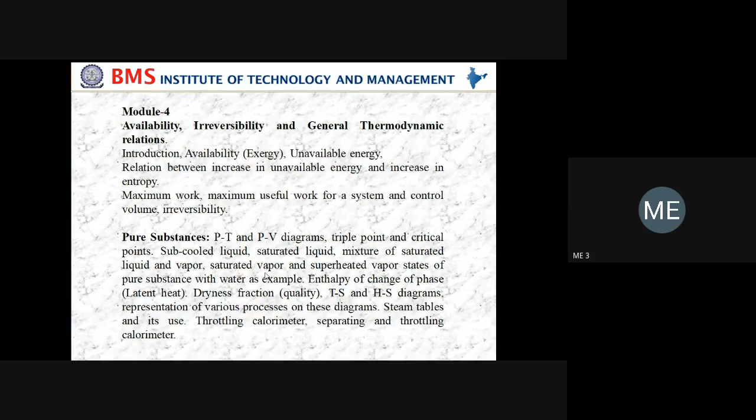So for pure substance, we already studied homogeneous system and heterogeneous system in module one, in the basic definitions of thermodynamics. Can anyone tell me what do you mean by homogeneous phase and heterogeneous phase? Can anyone give an example of homogeneous and heterogeneous system?

So the atmosphere is heterogeneous because of dust particles as well as gas present in it. And if you take a pure substance like a gold bar or pure liquid nitrogen, all those are homogeneous.

Okay, but in terms of characteristics, how are we going to differentiate? Whatever good examples are there, how are we going to differentiate? In what way? What is the exact meaning of homogeneous system, and what is the meaning of heterogeneous system?

So the homogeneous system will have similar behavior all over the entire volume. The entire volume will have the same behavior. But heterogeneous, the entire volume will have different behavior at different points.

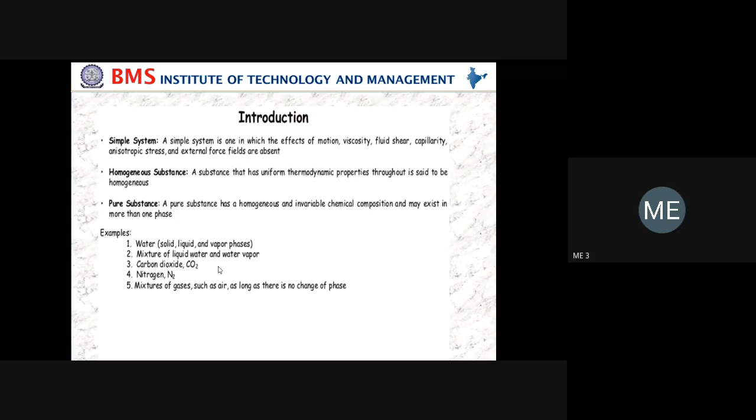For example, water: solid, liquid, and vapor phase. Solid means ice, liquid phase is water, and vapor phase is steam. A mixture of liquid water and water vapor is also a homogeneous system, and that is an example of pure substance. Carbon dioxide, nitrogen, and mixtures of gases such as air are also examples of pure substance.

So whenever they ask about pure substance, you have to define it like this: it is homogeneous in composition, homogeneous in chemical aggregation meaning the chemical composition remains the same throughout the system, and invariable in chemical aggregation, meaning the state of chemical combination does not change with respect to time. These are the three main points related to pure substance.

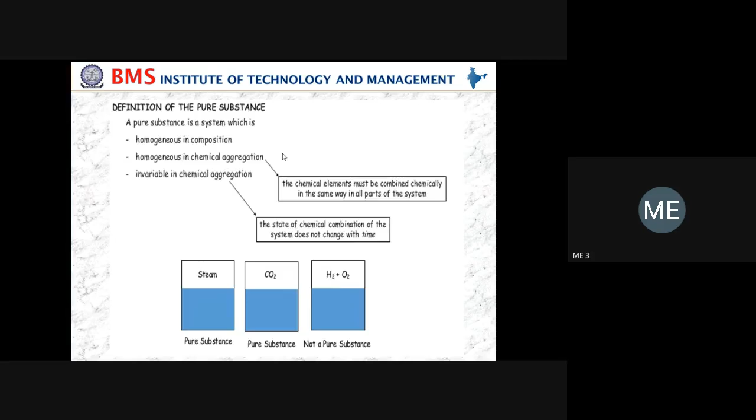Now, here mainly we are going to deal with steam in this chapter. What is steam, the different conditions of steam, how the formation of steam takes place. And you already studied steam tables in Elements of Mechanical Engineering.

Can anyone tell me the significance of steam tables? Where are you using steam tables? Hope you have done problems on steam tables also. What is the importance of the steam table, and where are you using it?

Okay, steam table. I'll explain in further classes. It gives the details of steam at various pressures and temperatures - what is the enthalpy, what is the entropy. We get all this information using the steam tables. By knowing the steam table, we can easily find out the remaining properties.

Before that, first we should know what is steam. It is the vapor of water, and it is invisible when pure and dry. So it's difficult to see the pure form of steam.

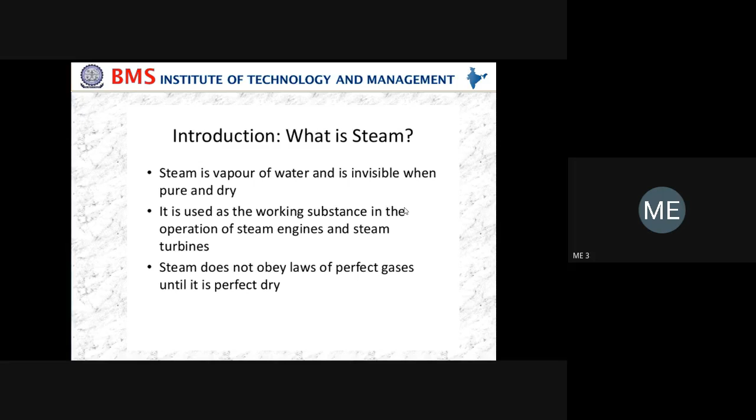Starting, we consider 1 kg of water at 0 degrees Celsius, and the initial volume of the water is represented as V1. This is the starting phase - just a basic diagram.

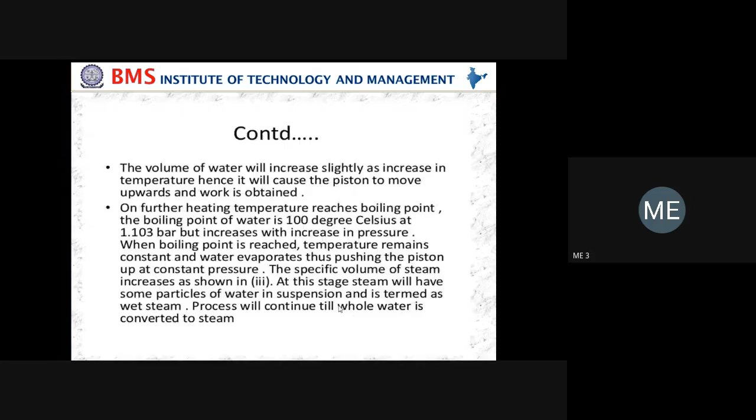I'll repeat once again. It is formation of steam at constant pressure. Consider 1 kg of water at 0 degrees Celsius in a cylinder bounded by a piston. A weight is placed over the piston, and whatever weight is placed on the piston balances the upward force exerted by the water. According to Pascal's law, the fluid exerts pressure equally in all directions.

We are going to learn Pascal's law in fluid mechanics in the fourth semester, so we'll come to know everything. According to that law, the fluid exerts pressure equally in all directions. Whatever upward force is exerted by the water balances the downward force exerted by the weight placed on the piston.

V1 is the initial volume of the water. Anyhow, pressure remains the same, that is 1 atmosphere pressure, 1.01325 bar. We are going to supply heat externally to the cylinder. On supply of heat to the water, the temperature of the water increases, and then the water slowly starts changing its phase from water to vapor.

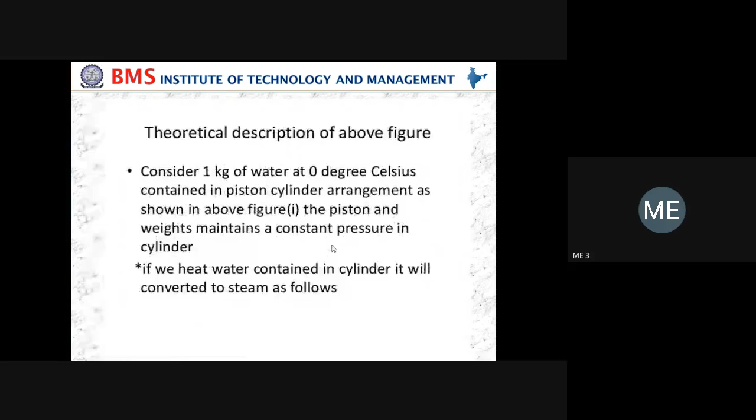On further supply, once the water reaches the saturation temperature, there is no change in temperature, but all the water particles in the cylinder get converted into steam. So we get the dry saturated steam, and on further supply of heat, that dry saturated steam is converted into superheated steam.

Remember, superheated steam is always achieved when it is the dry steam above the saturation temperature. At saturation temperature, you will not get superheated steam; we have to supply more heat. When the temperature of the steam is above 100 degrees Celsius, then only we'll achieve superheated steam. This is how the formation of steam takes place at constant pressure.

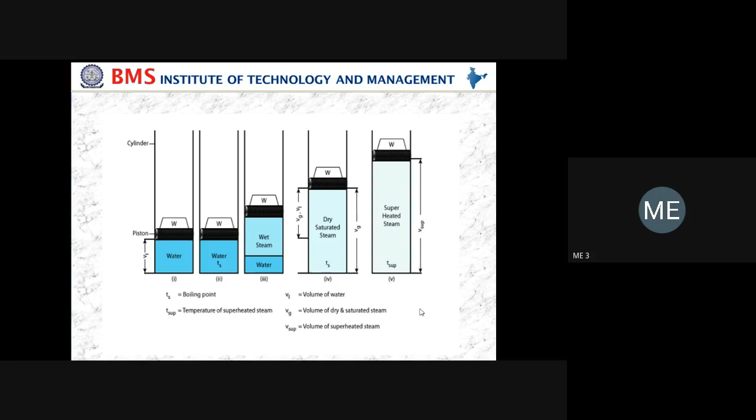So you have to draw these five diagrams plus this enthalpy TH diagram. Based upon that, we are going to define these terms. There are three phases of steam: one is wet steam, second is dry steam, and third is superheated steam.

Wet steam is the mixture of water plus steam. In the exam they may ask you to define the term wet steam: mixture of water plus steam, that is liquid plus vapor, at the boiling point temperature of water at a given pressure. The boiling point of water is 100 degrees Celsius. Remember, it is the mixture of water and steam at the boiling point temperature of water at a given pressure.

Next, dry steam. Dry steam is steam at a given pressure that contains no water particles in suspension. It is also called saturated steam, dry saturated steam, or dry steam.

So here it does not contain any water particles in suspension. Superheated steam is when you heat the dry steam above the saturation temperature, above 100 degrees Celsius. Whatever condition of the steam we get then is called superheated steam. These are the 3 basic types of steam.

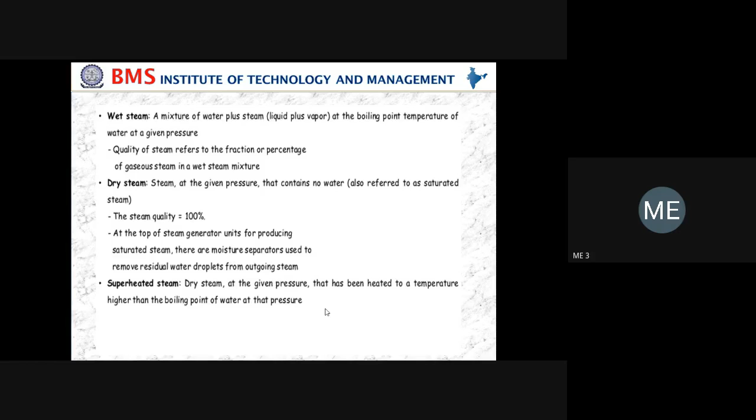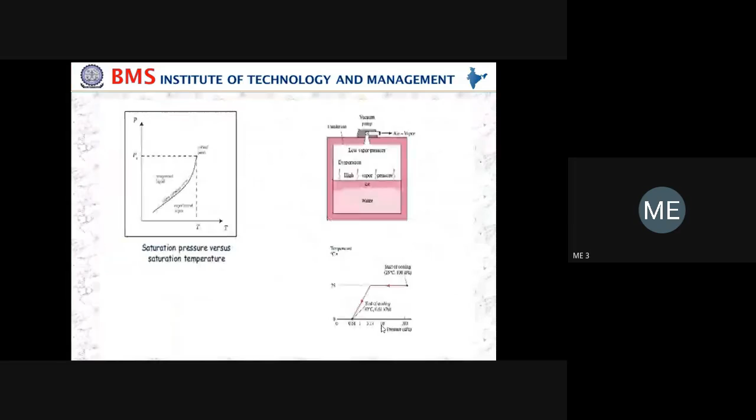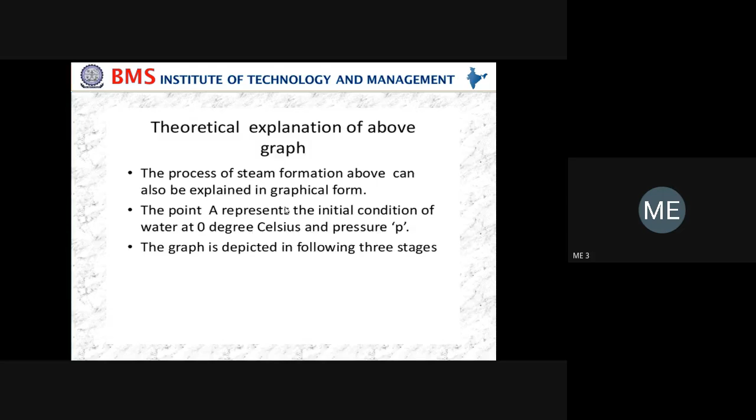And one more thing, here they will ask you to draw the TH diagram or TV diagram. Don't make confusion between TH and TV diagram. Whatever I explained, these are different diagrams. Starting with what I explained, it was the TH diagram, temperature enthalpy diagram, so in the x coordinate you take enthalpy and in the y coordinate you take T. Whatever diagram I am explaining now is the TV diagram.

In the exam particularly they ask you to sketch the TV diagram for a pure substance, or the pH diagram for a pure substance, like that. So be careful with the coordinates. Whatever I am explaining now is the TV diagram, temperature and volume diagram.

So first you have to draw this curve. This first curve is the saturated liquid curve, and whatever line we are drawing is called the liquid saturation line. Then we have the saturated vapor phase, and whatever line represents that is called the vapor saturation line. And here we have wet vapor.

Wet vapor means it is a mixture of water particles and vapor phase. And whatever you see here is called the CP or critical point. In pure substance, we have two important terms: one is called critical point, and the second one is called triple point.

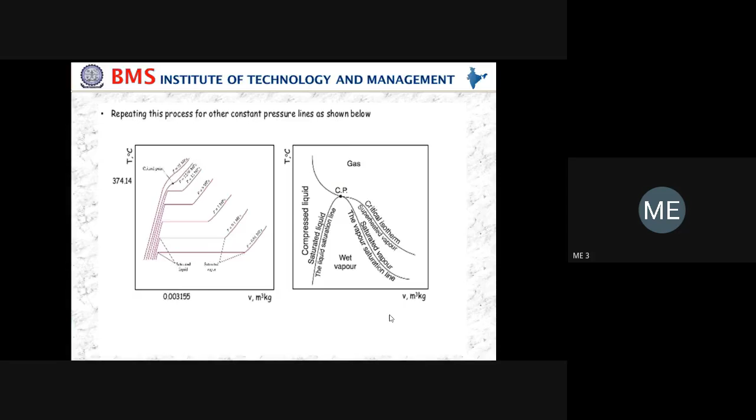So can anyone explain what you mean by triple point? I explained this already in the first chapter. Anybody? What is the meaning of triple point? Triple point of water. Anyone? Anybody, triple point of water?

For water it is 0.01 degrees Celsius at triple point. Correct. But how will you define triple point of water? In the definition of triple point, sir, it is a state where the solid, liquid, and vapor phases of water together are in equilibrium. Correct. All three phases, solid, liquid, and vapor phases of a pure substance, exist in equilibrium condition. That is called the triple point.

And in this chapter you are going to study one more point called the critical point. The critical point is the point where all the liquid phase is directly converted into vapor phase without supplying heat. So that is the definition of the critical point. There is no distinct phase between the liquid phase and vapor phase beyond this, there is a direct conversion of liquid into vapor phase beyond the critical point.

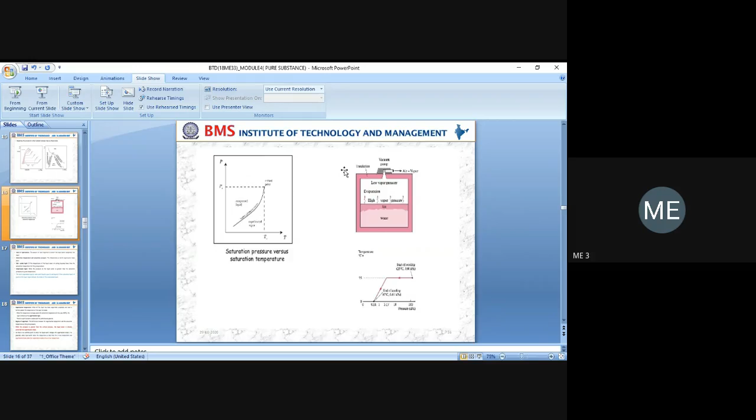First term is heat of vaporization. How do we define the amount of heat required to convert the liquid water completely into vapor? See in the diagram, this is called heat of vaporization. The amount of heat required to convert the water at saturation temperature, that is called heat of vaporization.

Can you tell me the other name for this one? What is the other name? There are two terms: one is latent heat and one is sensible heat. What is the difference between latent heat and sensible heat?

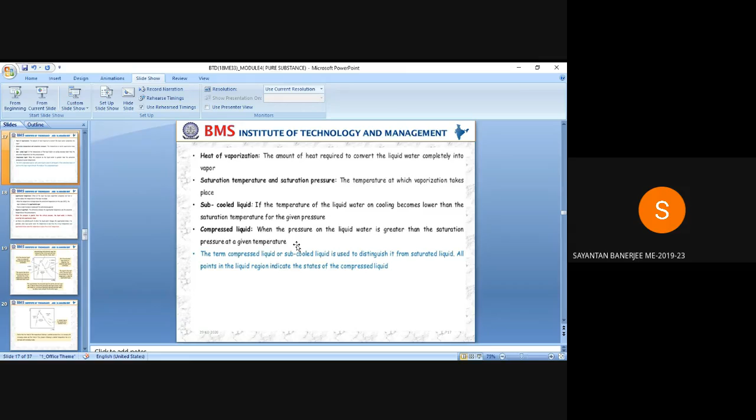Latent heat is heat that is present in the substance when change of phase is occurring, and it cannot be measured using a thermometer, but sensible heat can be measured by seeing the rise in the thermometer liquid. Correct. So the first one is sensible heat.

As I said, during the supply of heat, the temperature of the water changes. Whatever the temperature between 1 and 2, that is called sensible heat. Amount of heat required to convert 1 kg of water at 0 degrees Celsius to 1 kg of vapor phase at saturation temperature - this includes both water and vapor phase. It's a conversion of 1 kg of water, amount of heat required to convert 1 kg of water at 0 degrees Celsius and 1 atmospheric pressure up to saturation temperature. That is called sensible heat.

Whatever portion is there in between this straight line, that is called latent heat. Latent heat means the amount of heat required to convert 1 kg of water at saturation temperature. Here you start by taking 0 degrees Celsius, but while defining latent heat, you have to change the definition. The amount of heat required to convert 1 kg of water at 100 degrees Celsius at saturation temperature to 1 kg of dry saturation steam at the same temperature and given pressure.

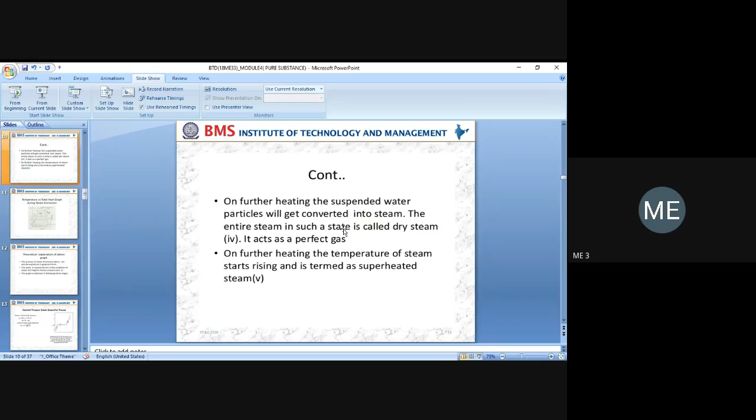And then we have two more terms called subcooled liquid and compressed liquid. See in the diagram. The definition of subcooled liquid: if the temperature of liquid water on cooling becomes lower than the saturation temperature at the given pressure, that is called subcooled liquid. The temperature of the liquid water on cooling becomes lower than the saturation temperature.

Temperature of the liquid phase on cooling becomes lower than the saturation temperature at a given pressure. Such condition is called subcooled liquid.

On the other hand, we have compressed liquid. Compressed liquid means when the pressure of the liquid is greater than the saturation pressure at a given temperature. So we have saturation pressure and saturation temperature, the condition of the steam at saturation temperature and saturation pressure. When the pressure of the liquid is greater than the saturation pressure at a given temperature, that is called the compressed liquid.

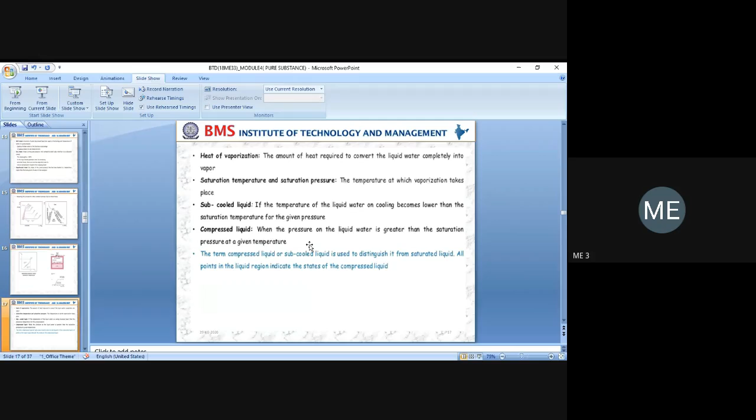Apart from this, we have superheated temperature. Superheated steam is achieved when you supply heat above the saturation temperature. When all the liquid has evaporated completely, meaning there are no water particles in suspension, and heat is further added, the temperature of the vapor increases. When the temperature increases above the saturation temperature, the vapor phase is called superheated vapor. Superheated vapor is achieved by heating the dry saturated steam above the saturation temperature. That is called superheated temperature. So one is saturation temperature and one is superheated temperature.

Next, degree of superheat. Hope you understood saturation temperature and superheated temperature - that is when the temperature increases above the saturation temperature, called superheated temperature. Saturation temperature is the boiling point of water, that's 100 degrees Celsius. The third term is degree of superheat, the difference between superheated temperature and saturation temperature at a given pressure. For example, if 300 degrees Celsius is your superheated temperature and 100 degrees Celsius is the saturation temperature, then degree of superheat is 300 minus 100, that is 200 degrees Celsius. So it's the difference between superheated temperature and saturation temperature at the given pressure.

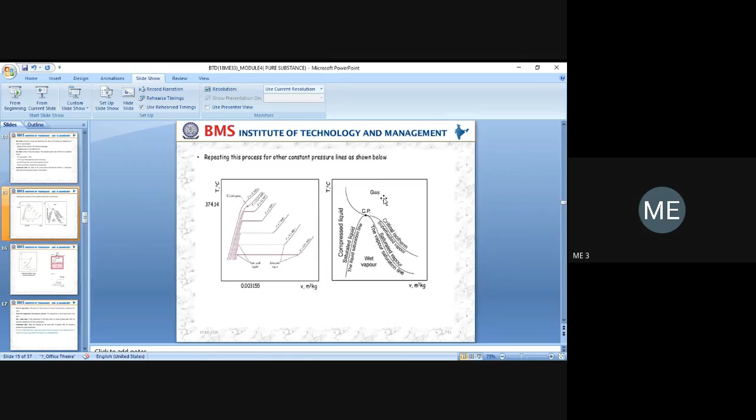One more important term: when the pressure is greater than the critical pressure, the liquid water is directly converted into superheated steam. Look at the diagram - whenever the working substance has pressure greater than the critical pressure, all the liquid is directly converted into superheated steam. This is one of the important points.

So we studied the temperature enthalpy diagram, second one the temperature volume diagram. We studied first the TH diagram, that is formation of steam at a given pressure. Second, we studied the temperature volume diagram, and third one we are going to study now.

This is called the PT diagram, pressure versus temperature diagram. Pressure you take on the y coordinate and temperature on the x coordinate. Remember the nature of the curve, how you draw it in the TH diagram and in the PV diagram, and then we have the PT diagram. So be careful about the x and y coordinates - on the y coordinate take pressure, and on the x coordinate take temperature.

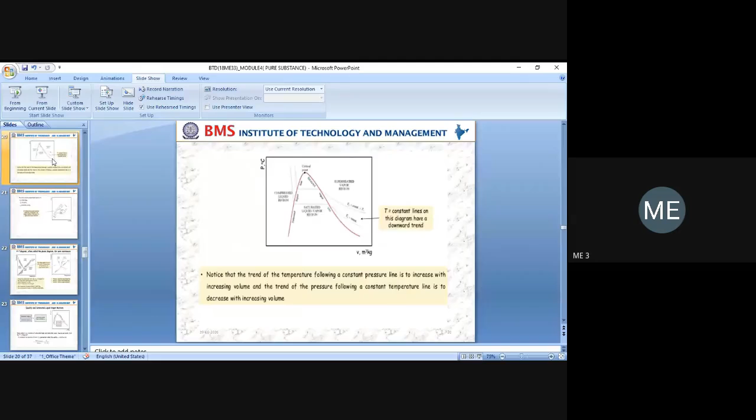These are the most important diagrams, you have to practice all of them. One is the TH diagram, second one is the PV diagram - first one TH, then TV, and then PT. These are the three diagrams.

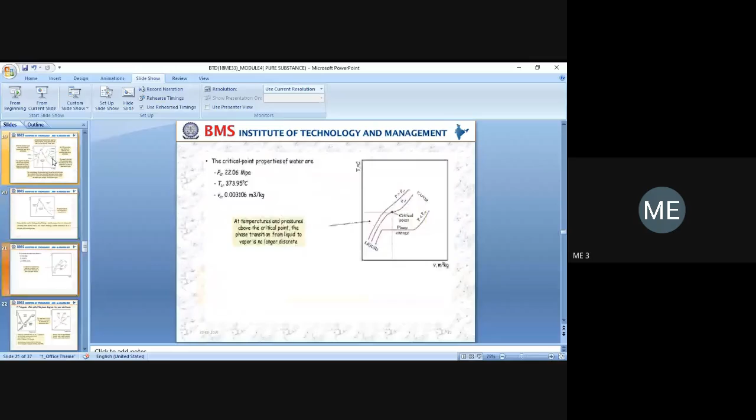One is vaporization, one is sublimation, and one is condensation. Vaporization means the amount of heat required to convert 1 kg of water to 1 kg of steam. That is called vaporization. There is a change of phase from liquid to vapor. Second one is condensation. Anybody, what do you mean by condensation?

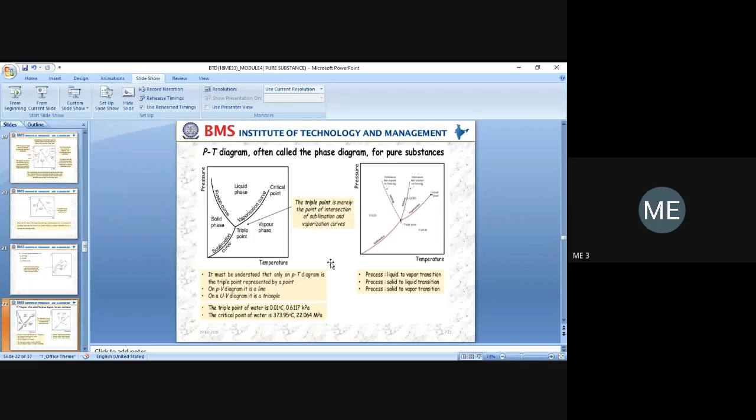Okay, next, what I said. So sometimes they used to ask, define the term sensible heat. As I said, it is the amount of heat absorbed by 1 kg of water when it is heated from 0 degrees Celsius to boiling point. Sensible heat is the amount of heat supplied to 1 kg of water when it is heated from 0 degrees Celsius to boiling point. It's nothing but your saturation point. This is the definition of sensible heat.

Whatever I have shown in the diagram, the TH diagram, it is there. So whatever temperature, the amount of heat required to convert 1 kg of water at 0 degrees Celsius to 1 kg of water at saturation temperature, that is called sensible heat. That is the definition of sensible heat.

Okay, the second definition is your latent heat, what I said, heat of vaporization or latent heat. And it is represented by, here you have to remember a symbol also: HF is the notation for sensible heat. Okay, same thing you are getting in the steam table, so whenever you are having HF, you recognize it as sensible heat.

And latent heat, or it is the heat of vaporization, that is latent heat, represented by symbol HFG. It is the amount of heat required to convert 1 kg of water at saturation temperature to 1 kg of dry saturated steam at the same temperature, means at saturation temperature and at the given pressure. That is the definition of latent heat.

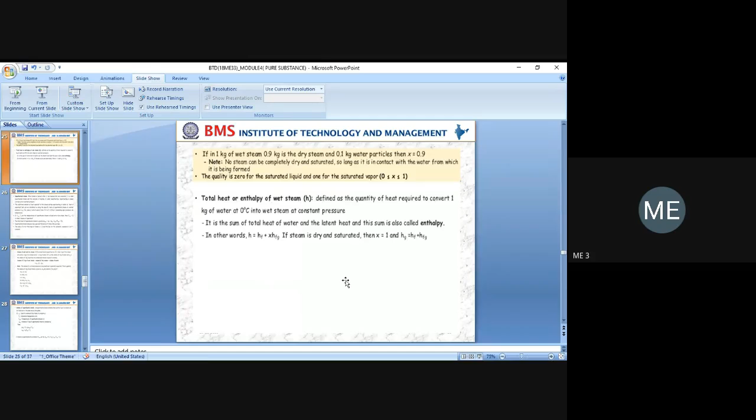Then there is total heat or enthalpy of wet steam. We define the enthalpy of wet steam as the summation of sensible heat and latent heat. It is defined as the amount of heat required to convert 1 kg of water at 0 degrees Celsius to 1 kg of wet steam at constant pressure, so HF plus X HFG.

So HF is this portion and HFG is this portion, whatever lies between points 2, 3 and 4. Total enthalpy means between point 1 and this point, the summation of sensible heat and latent heat. It is the amount of heat required to convert 1 kg of water at 0 degrees Celsius to 1 kg of dry saturated steam at the saturation temperature.

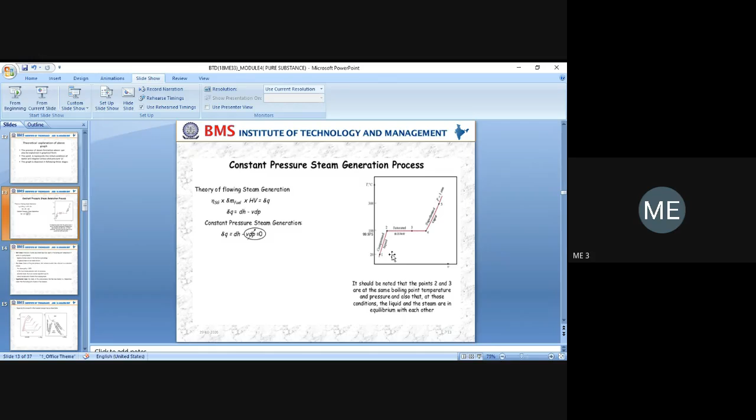That is the definition of total enthalpy. If they ask only latent heat, you take only the straight line portion. If they ask sensible heat, you take this other portion. Total enthalpy or total heat is the summation of sensible heat and latent heat, defined as the amount of heat required to convert 1 kg of water at 0 degrees Celsius to 1 kg of dry steam at saturation. That is the definition of total heat.

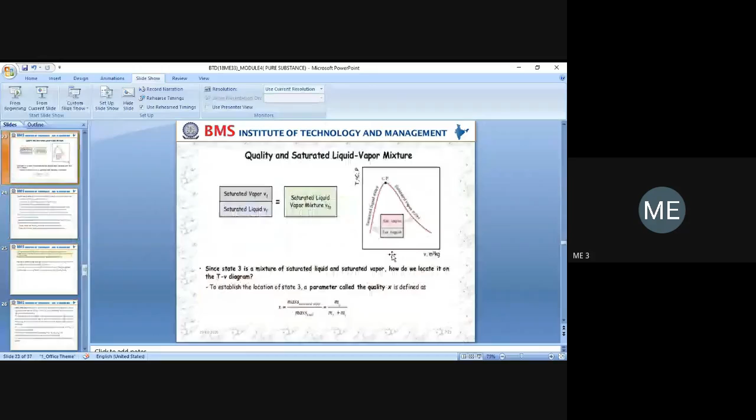Then we already know superheated steam: when we heat the steam above saturation temperature, that is called superheated steam. There is also degree of superheat, which is the difference between superheated temperature and saturation temperature. The total heat of superheated steam formula, H sup, you should remember. H sup means superheated steam enthalpy, which is the summation of sensible heat plus latent heat plus the heat required to convert 1 kg of dry steam into 1 kg of superheated steam.

Whenever they ask to find the enthalpy of superheated steam, remember this formula: H superheated equals HF (sensible heat) plus latent heat plus CPS into T sup minus TS. CPS is the specific heat of superheated steam. Recall we studied specific heat at constant pressure and constant volume in module 2; similarly we study specific heat of superheated steam, and it is always 2.1 if the value is not given in the problem.

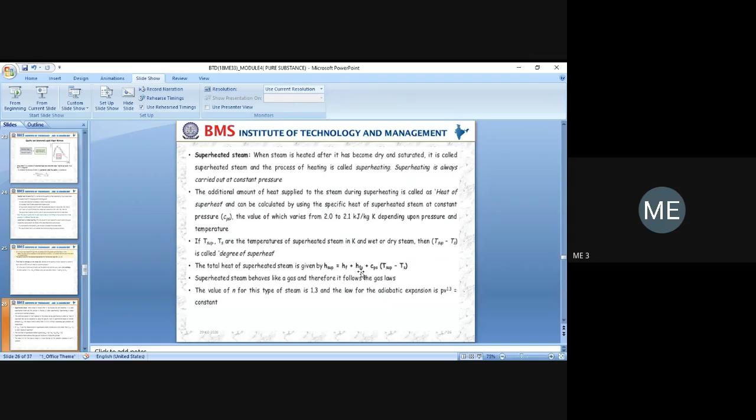I hope you understood. Concentrate mainly on the definitions: what is a pure substance, how the formation of steam takes place at constant pressure — that is most important, and you have to explain it with the diagrams and one T-H diagram. We also studied the P-T diagram, showing the triple point and critical point, and the three curves: vaporization curve, sublimation curve, and fusion curve. Then we studied one more diagram, the T-V diagram. So these are the things we studied, along with the definitions. Go through the definitions properly — whenever they ask for a definition, write it in technical terms, such as 'amount of heat required,' using the proper technical terminology.

We'll discuss some more concepts on pure substance in the next class.